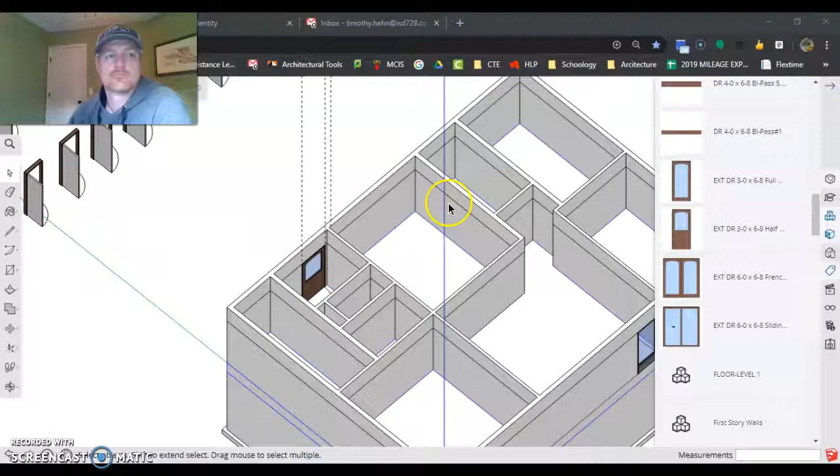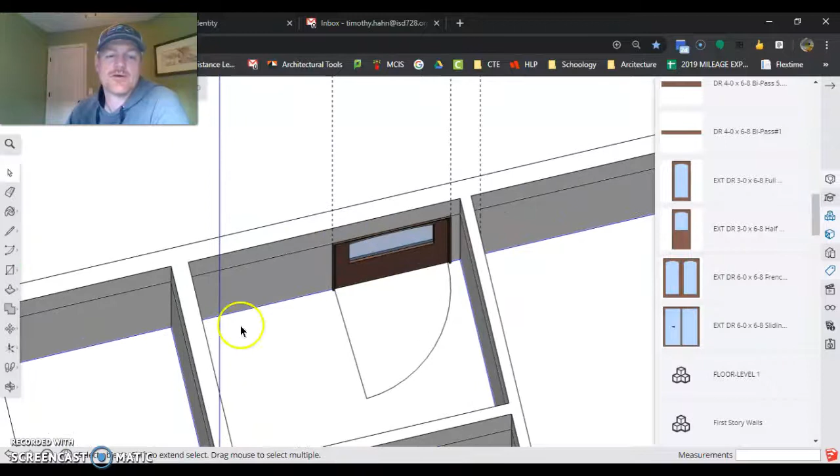Alright, so last video we got our two exterior doors in. Again, how you can tell if they're exterior or interior is if I flip this around, I can see it's gray on the exterior and it's brown on the interior. So, one thing though that we notice is this is going to be the washer and dryer over here. So we don't want the door this way.

So right now, we have a right-handed swing door, and how you know that is you put your back against the hinges. This is the hinge side of the door, this is the opening side. Put your back against the hinges, and which way it goes, so this one goes to the right, so it's a right-handed swing. If my back was here, this would be going to the left. This would be a left-hand swing. Back was here, right. Back is here, right. Back is here, left.

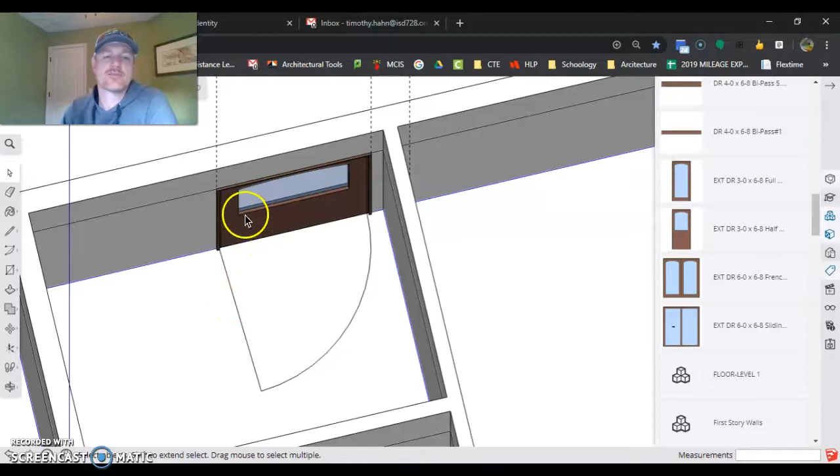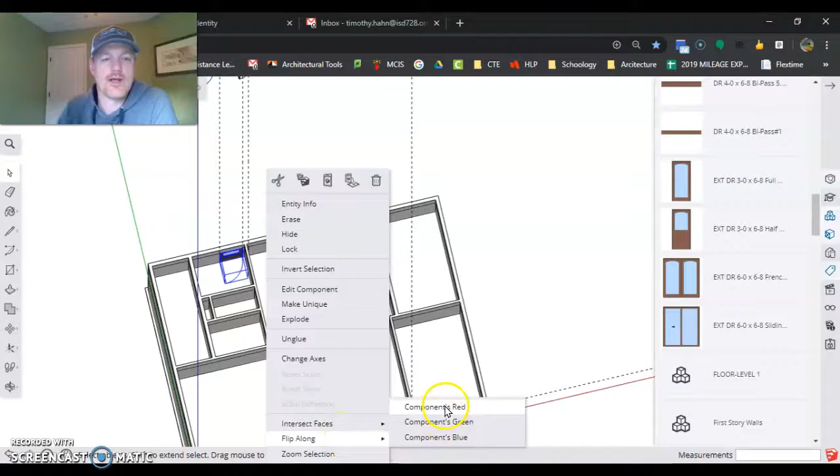So this is how to switch which way the door is going. So this one here, put my back against here, it's a left-hand swing. I need to make it a right-handed swing. I'm going to right-click on the component once it's in place, not change axes, right-click on the component, flip along, and then we have blue, green, and red. So I want to flip along red because it'll flip it this way.

Green would have flipped it inside outside. Blue would have flipped it upside down or right side up. If you flip the wrong axis, just hit the undo button and flip to the next axis. But there, now that door is opening the correct way.

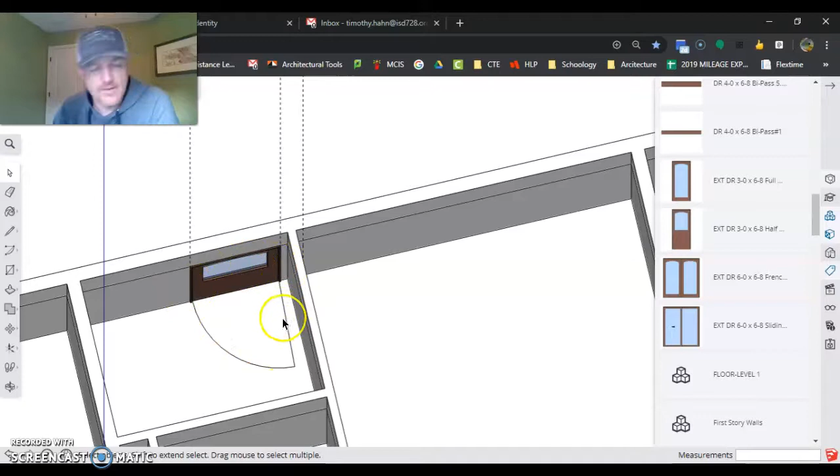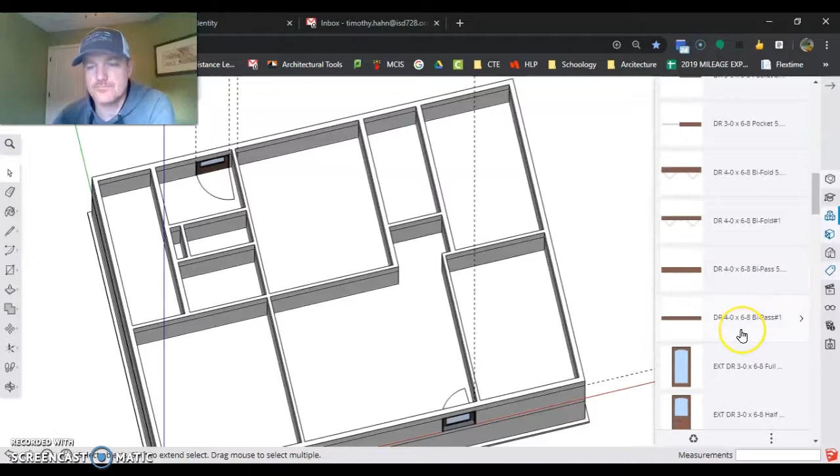Next, we're going to move on to interior doors. So interior doors, basically they go from 2.0 all the way up to 3.0 every 2 inches again. We want to put the biggest door we can in each area of the house. So the bigger the doors go, the more access you have to what's going on in there. So, notice my house here, I didn't have my closets in, but we can get those in later. But we're going to get these doors in here.

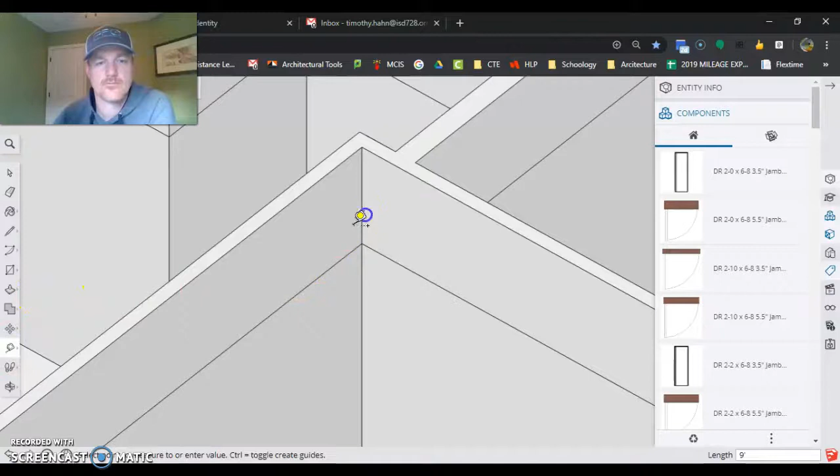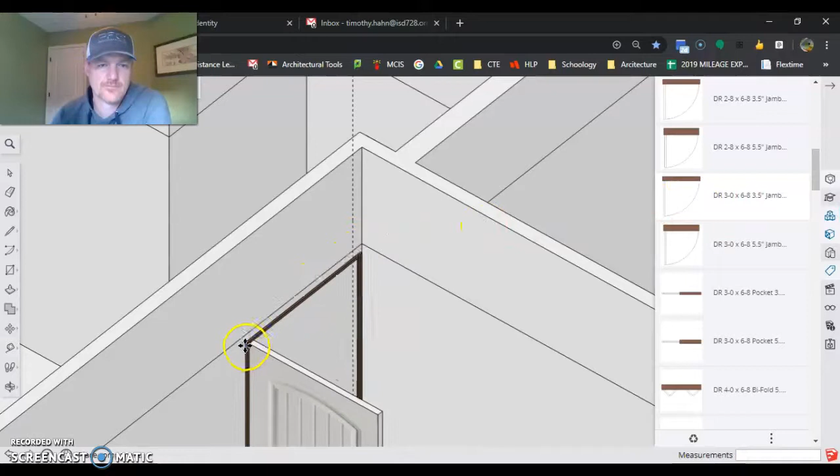First of all, we're going to put a 3.0 door in right here. So again, we're 3 inches off the edge. So I'm going to do a tape measure tool. Come down this line, type 3 and hit enter. And then this is a 3.5 inch wall, so I'm looking for a door that's a 3.0 and a 3.5 inch jamb. Again, I'm grabbing at the wrong edge right now, but that's perfectly fine.

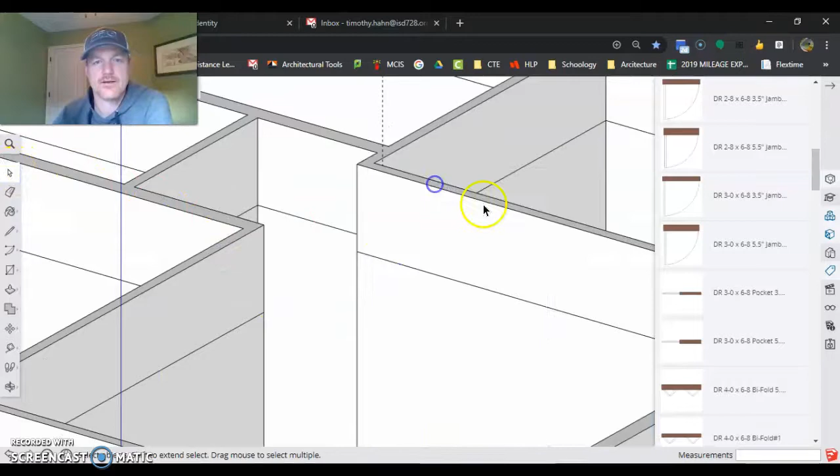I can put it right there. Good to go. I'm going to go on the back side of this. Did I make sure to be inside the model? No, not this time. That's okay. Right click, cut, double click. Now I'm inside my model. Right click, paste in place. Simple way to work with inside your model, outside your model.

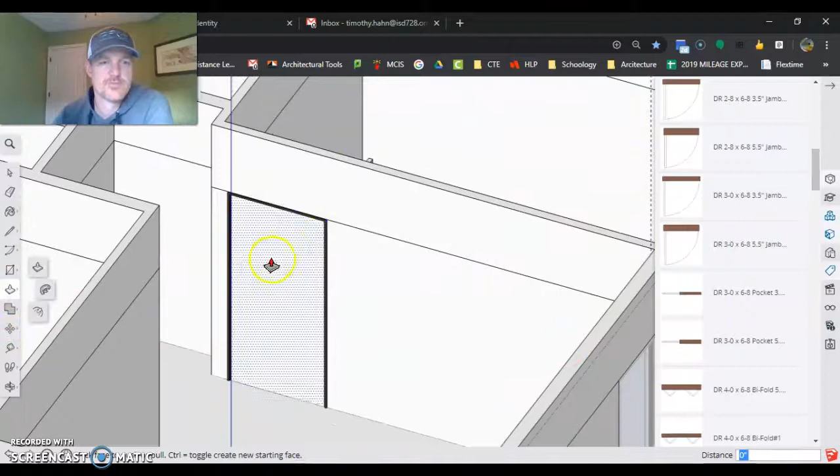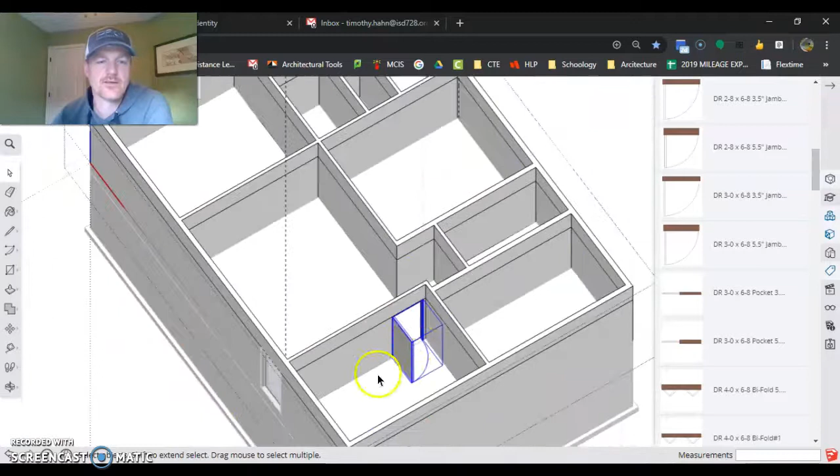Draw that door opening. Boom, boom. Push, pull. Cuts the opening for me. Door is flipped the wrong way. So I'm going to right click on the door and I'm looking at my axes. I want it to go this way so it's on the green. Flip along, component's green. Uh-oh. So I didn't do that right, so green went up and down. Let's try blue. Or flip along, component's red.

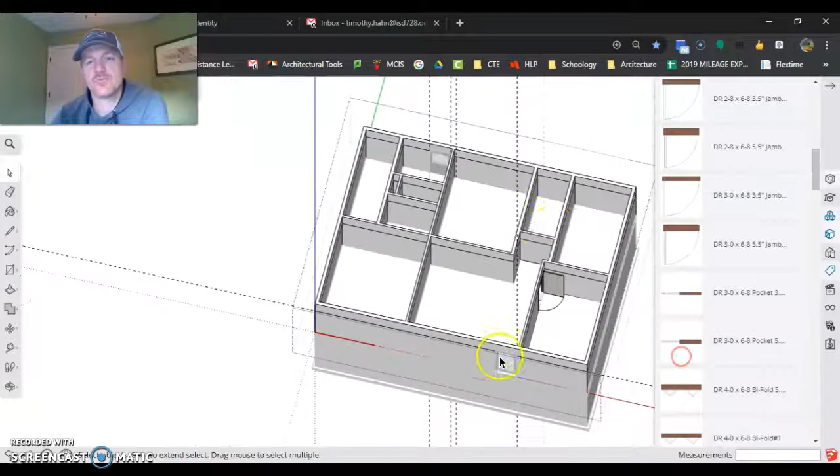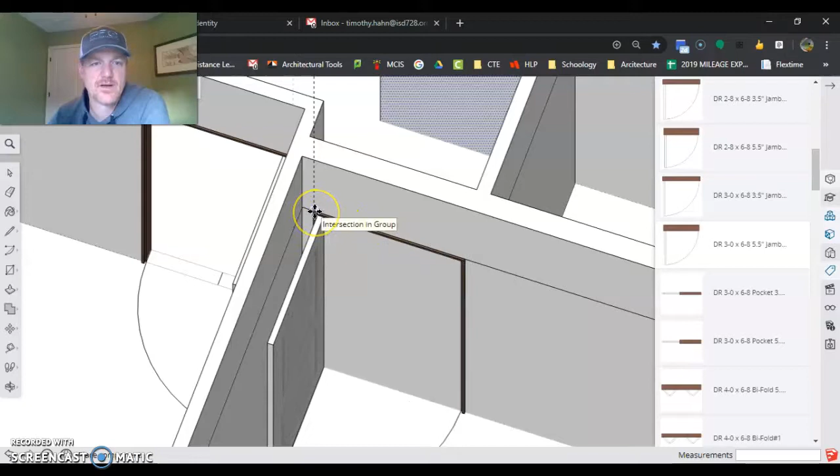We have that door placed in there. Come over to this door, push, pull, or tape measure, 3 inches off the side. Now this wall here is at 5.5, so door 3.0, 5.5 inch jamb. Boom.

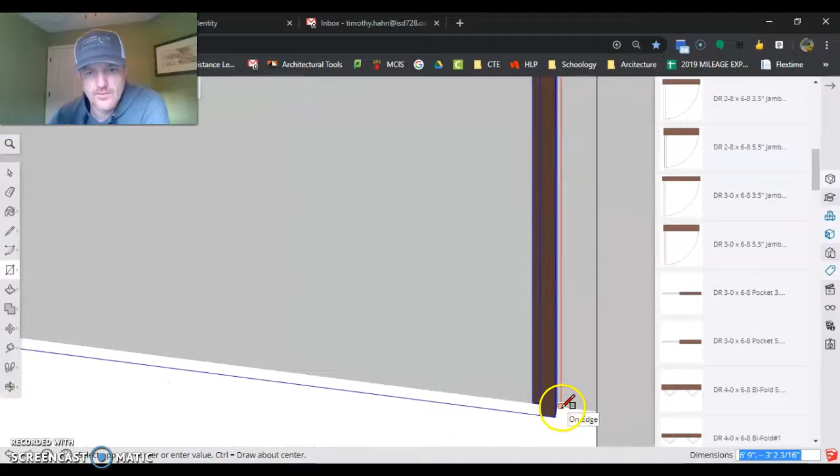Back side, draw the hole. I'm using my mouse wheel to scroll in and out a ton. Push, pull. So it says offset, and we got a hole cut. Perfect there.

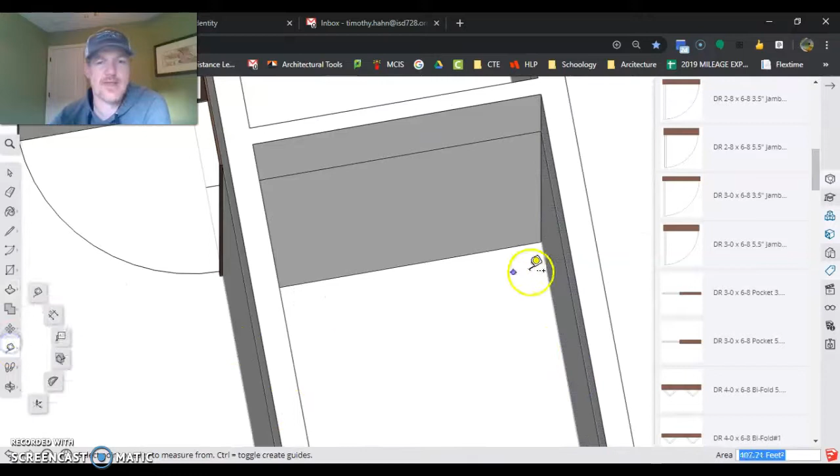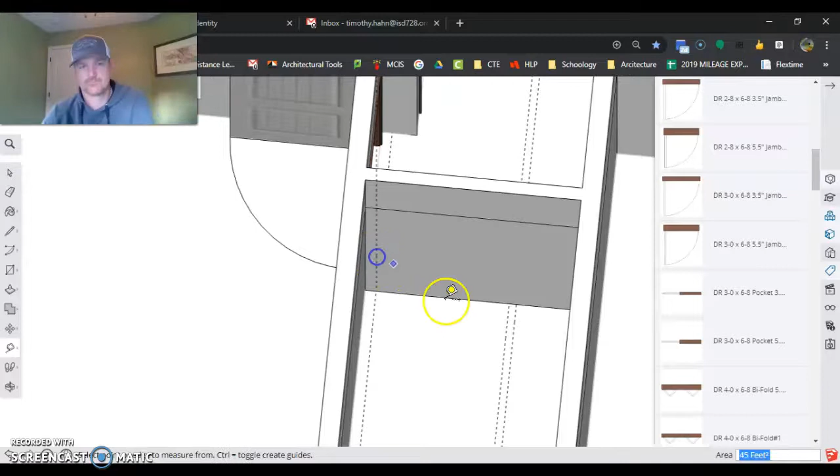Bathroom. Got to figure out the bathroom. Bathroom vanity. I know you guys don't know this, but a bathroom vanity is 18 inches deep. So I'm going to put an 18 there. And then the countertop hangs over about 2 inches. So now I'm going to come in 3 inches here, and see what I have here. From here to here is 3 foot 1 inch. So I'm going to have to put in a 2 foot 6.

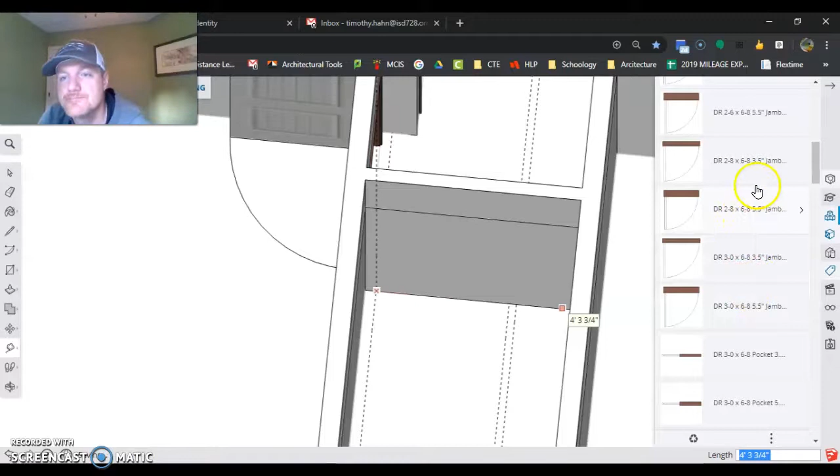Because if I do a 3/0 here, my 3/0 is actually 2 inches bigger, so I'd go all the way up to there. So I could do a 2/10, and that's what we'll do. We'll do a 2/10 door. And oddly enough, 2/0s are up here with a 2/10 because it's alphabetical order. That's a 3.5 inch wall. Boom. Go to the back side. Draw my rectangle. There.

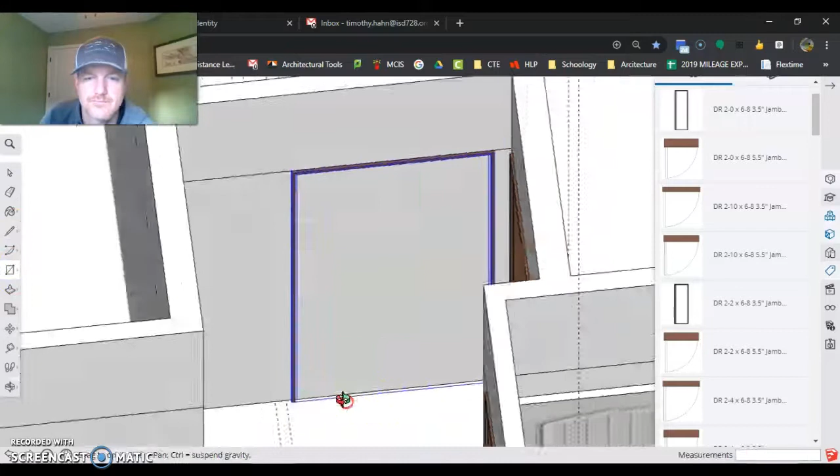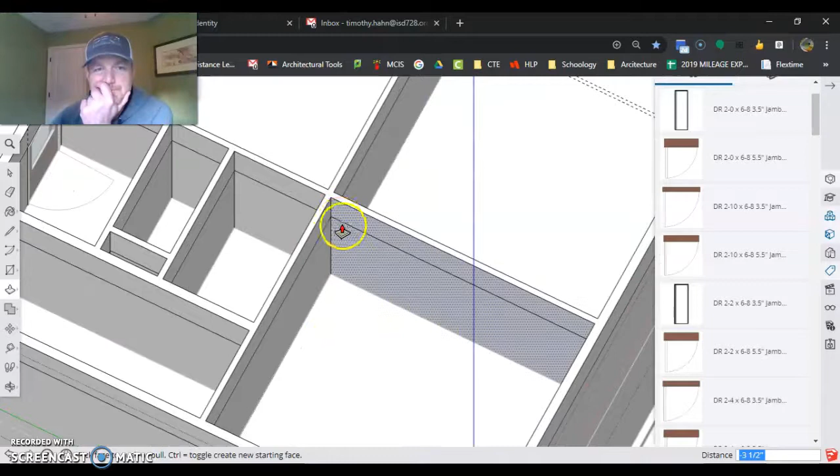There. Push pull. Cut the opening. Those doors are in. Coming over here, this is your standard 3/0 door. Don't have to show that. Let's figure this one out.

Closet shelving. Look over here. We have some closet shelving here, closet shelving here. Probably could get some hanging space here. We want to use as much space as we can. So this here, we're going to do a 2/6 door to get as much space in this closet as we can, and we don't want this door to hit over here. So we're going to go 2/6.

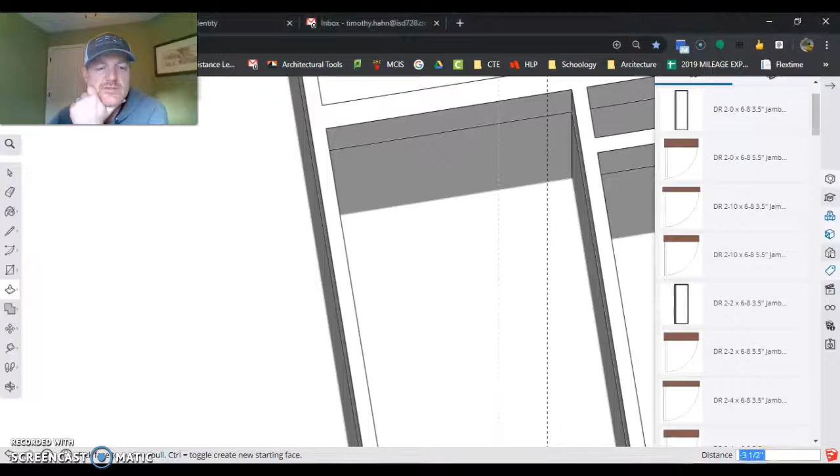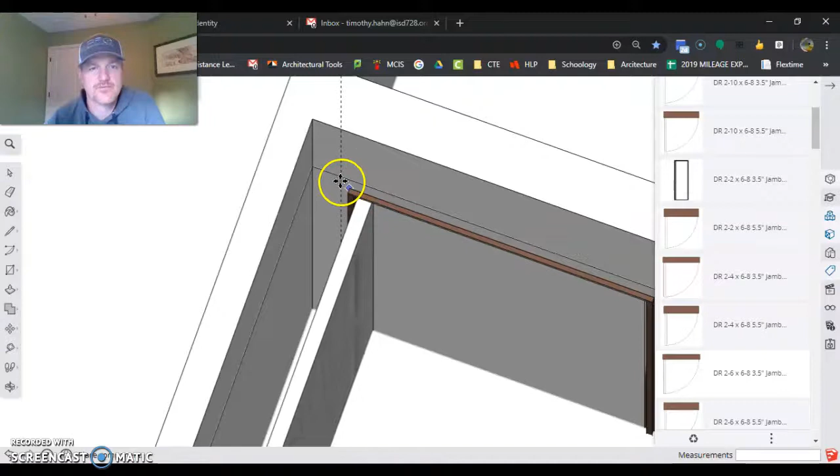Tape measure. 3 inches off the edge. Put in a door. 2/6. If it does a bunch of flipping like this, where I can't get it to go on that right spot there, I'm just going to click it when I get it on the wall, and then I'll click it again and move it into place.

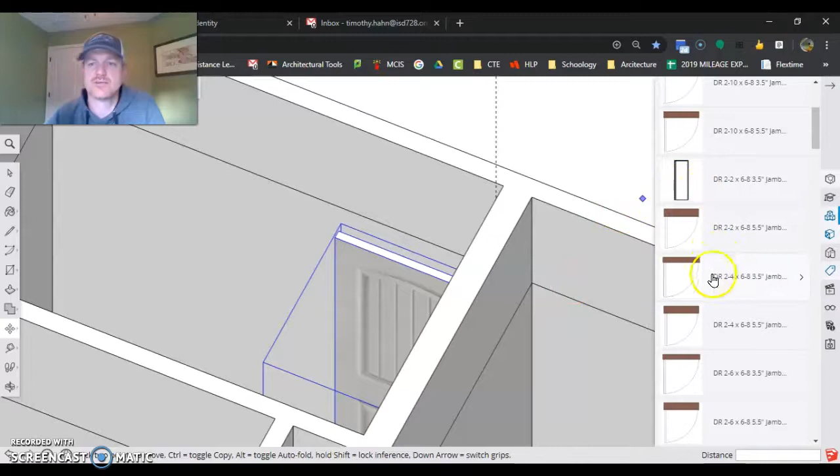Oh, the door didn't pop through, so what does that tell me? Oh, I used the 2/6 with the 3.5 inch jamb. I want to use the 2/6 with the 5.5. Didn't look at my wall thickness. 2/6, 5.5 inch jamb. That even went in a lot nicer.

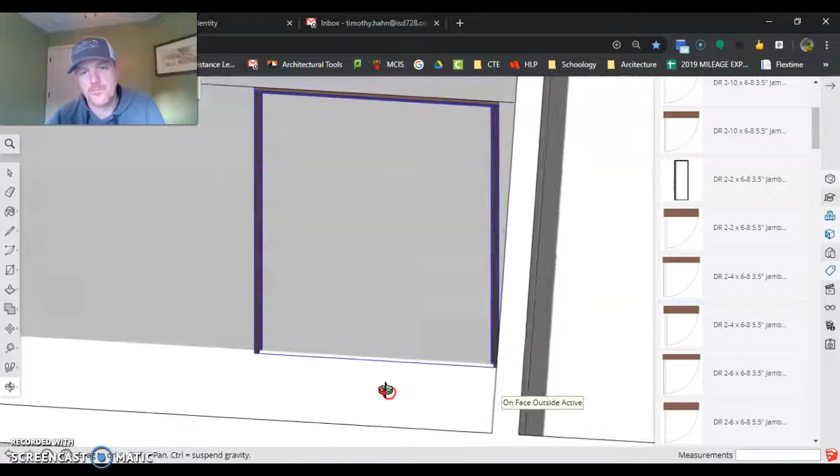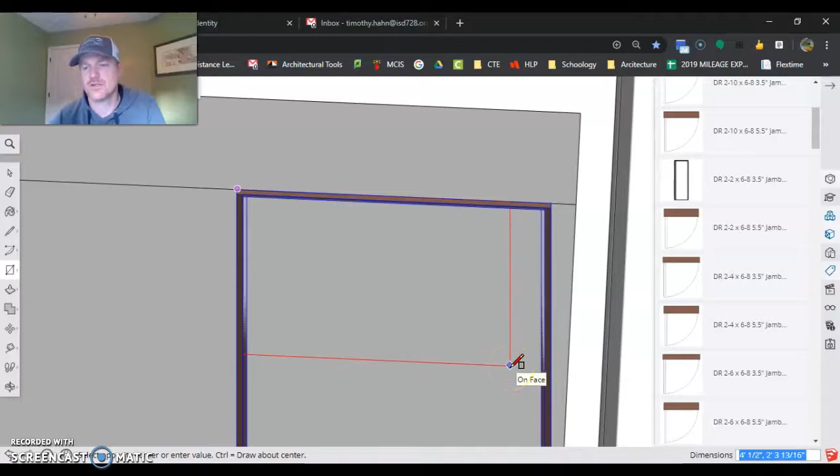See if I can get to this spot back here. It's not going to let me very easily. So I know this is 2/6 by 6/8. So I'm going to come here. I'm going to put it on the edge, and I look, 6'9", 6 feet 9 inches. I'm typing that now, comma, 2 feet 8 inches. Because the frame is 2 inches bigger than the door. Push, pull, and cut that hole out.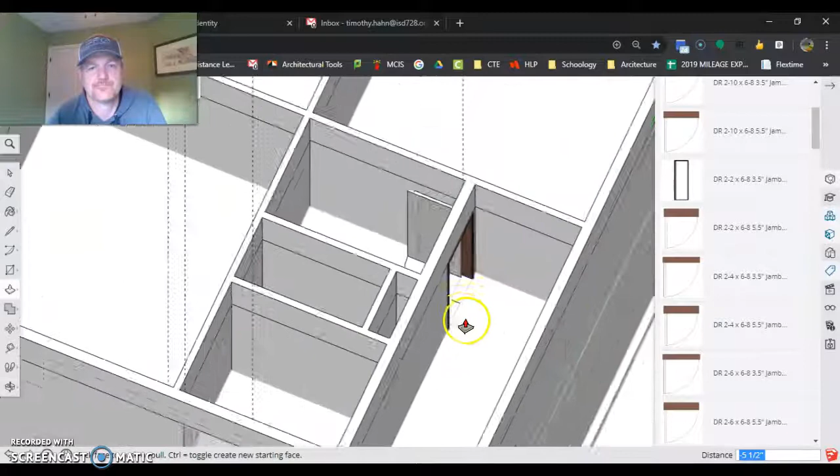It's going pretty well. I'm going to erase some of these guidelines just to clean this up a little bit. When I'm erasing, make sure you're not erasing stuff you need. Another guideline I drew outside. So we got that door there.

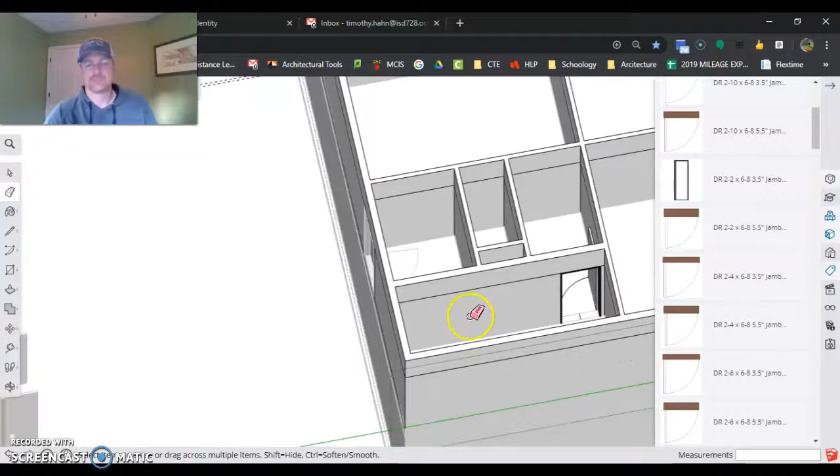In the 2 closets, if I take a peek over here, these 2 closets are bypass doors. You'll put them centered on that wall. We're not going to put the water heater in, so you can put it centered there. Over here, we're going to put a bypass door in as well.

Right here, you're going to have to figure this out. 18 inches plus a 2 inch overhang. Figure out which size door you can put in there, and put this door in right here. This door here is called a pocket door, so you're going to be using the pocket door. This is 2 feet or 24 inches to the edge plus 2 inches. Same thing here, 24 inches to the edge plus 2 inches.

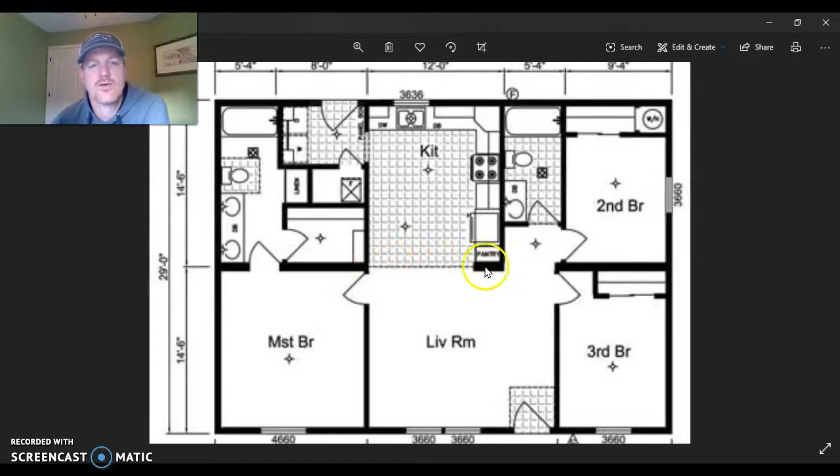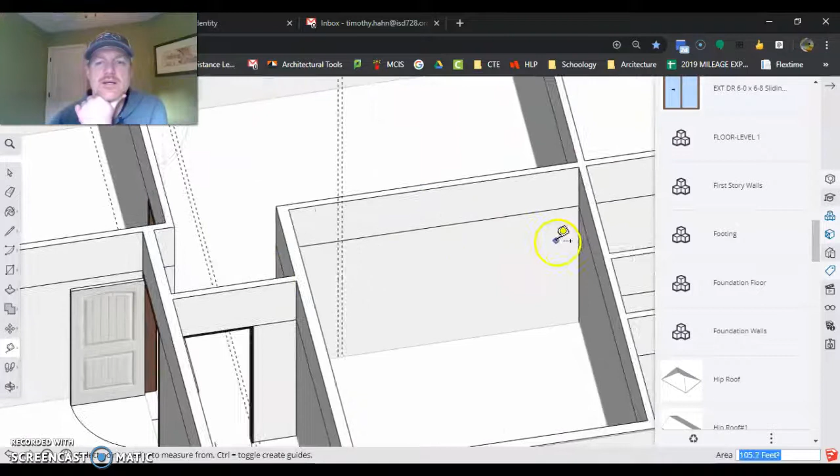And then this opening we're going to cut through this way. We'll do this opening right now. So here comes the kitchen opening. So we're going to grab here, 24 inches, that's the cabinets, and then we want to give it 2 inches so we don't have as much of a problem there. Notice we're leaving this wall header here. This is a header opening. Do that whole thing. Push pull.

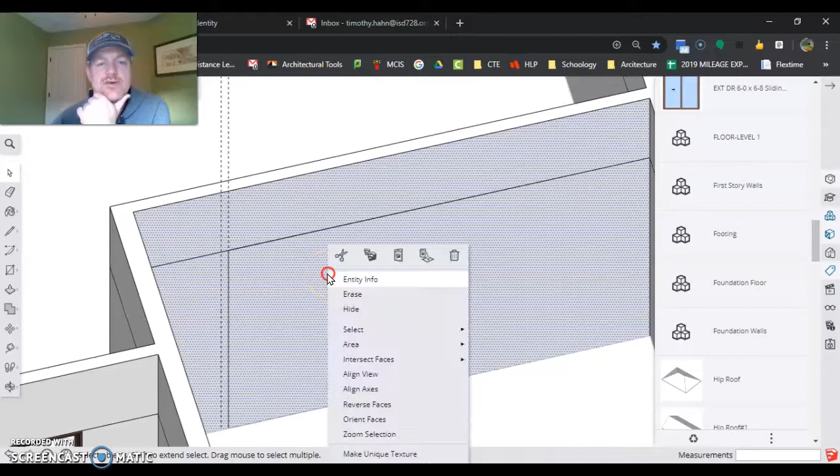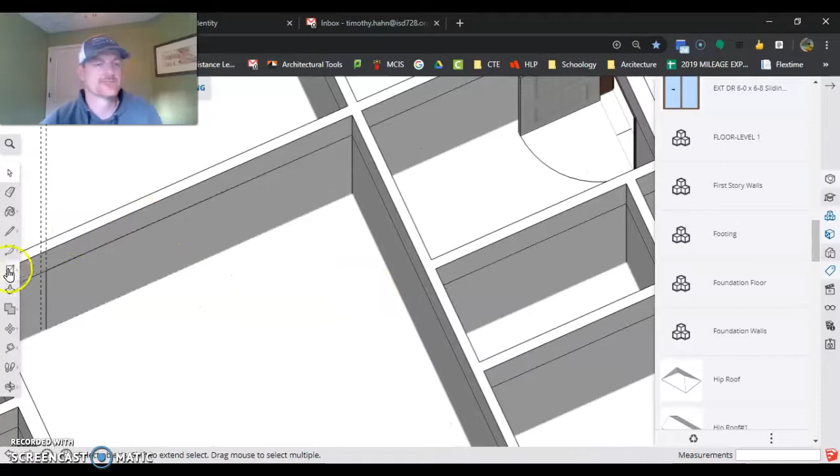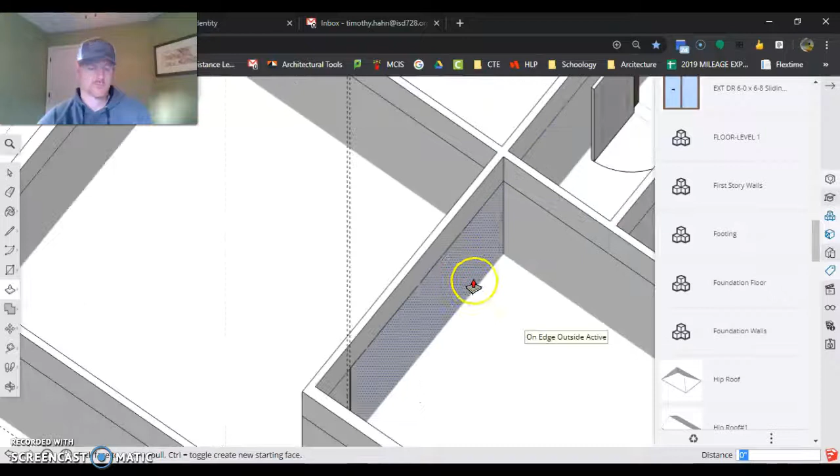Push pull didn't work for a second, so I'm going to try the first thing. Right click. I wonder if that 2 inches came off that face. Point. There we go. Push pull. Something funky's going on there. So we're just going to back out of it and start fresh. Maybe I'll try to cut it from this side. I want to make sure that this wall is selectable, and it is.

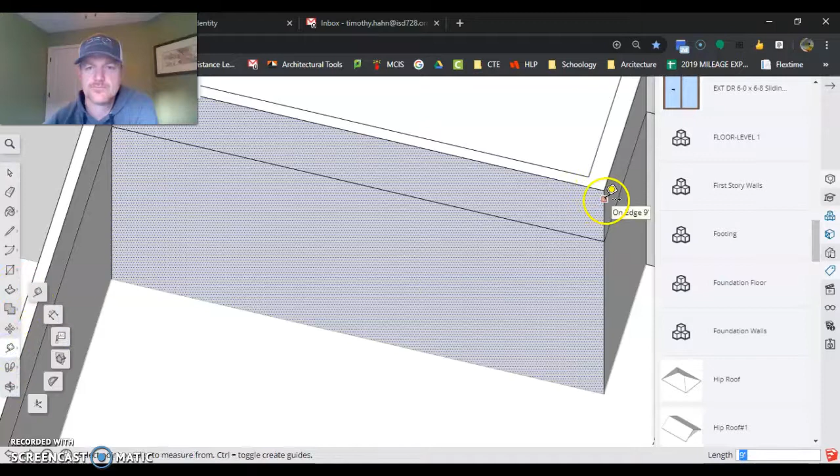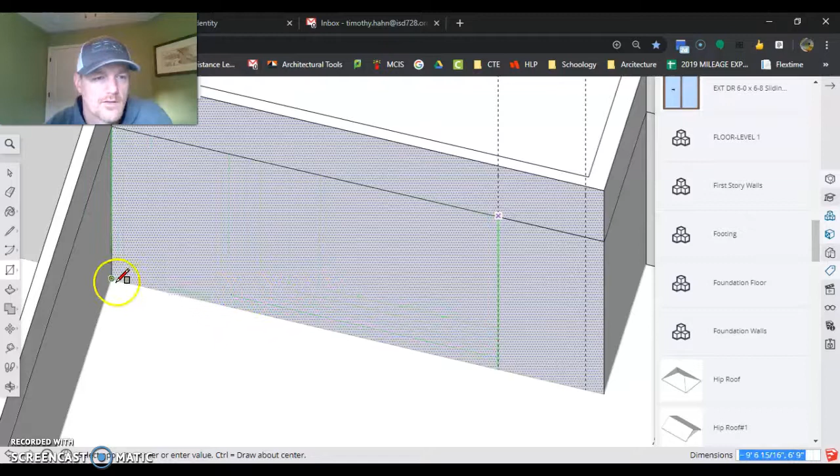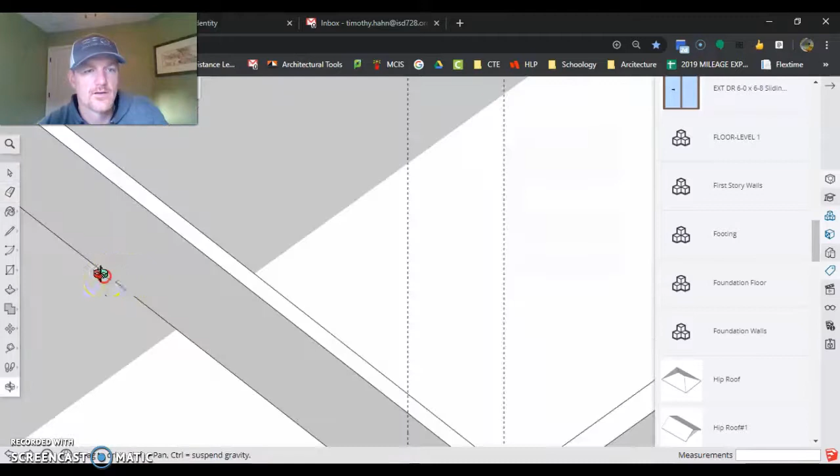So I'm going to go from there on this edge, and I'm going to touch to there. And now I'm going to go 24 plus 2 is 26. And I'm going to go rectangle. I'm going to go push pull. Touch that back wall. And then I can erase this bottom line. And it just made my opening. Erase that. Erase these 2 lines, and now I have my opening to get into my kitchen.

And that's how I insert doors. When you come back, I will have these closets done, I will have my bathrooms done, and all that. And you can get those done too.